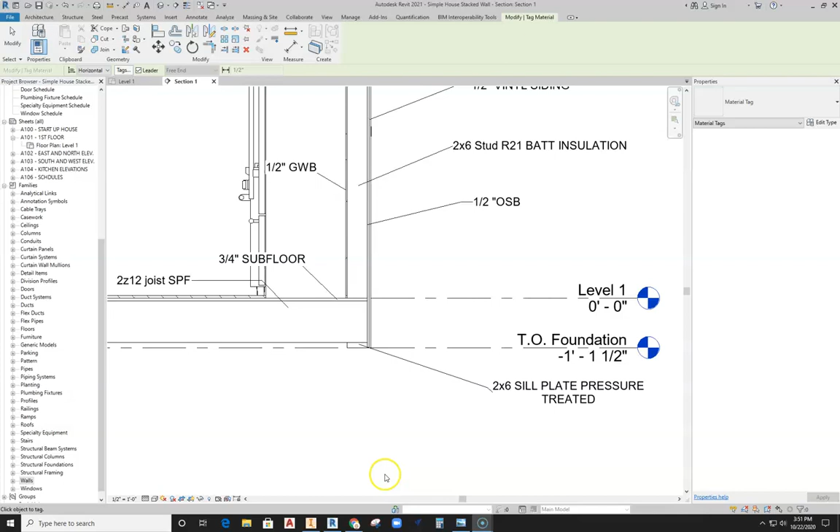Okay, in this video we're going to talk about how to get a foundation wall built underneath our stacked wall. If we jump back into the drawing assignment, you'll see we have our stacked wall on top, and underneath we have a foundation wall. This is a masonry wall, 8-inch by 16-inch masonry concrete, with a 24-inch footer underneath. We're going to build this as one wall.

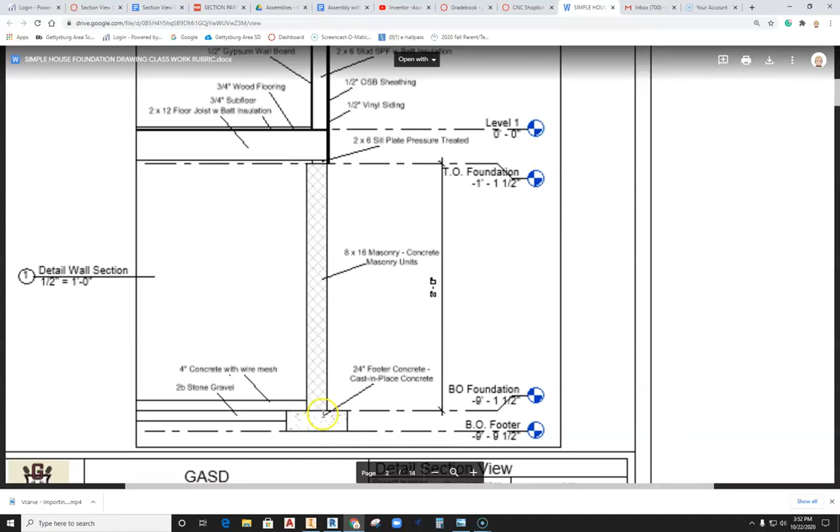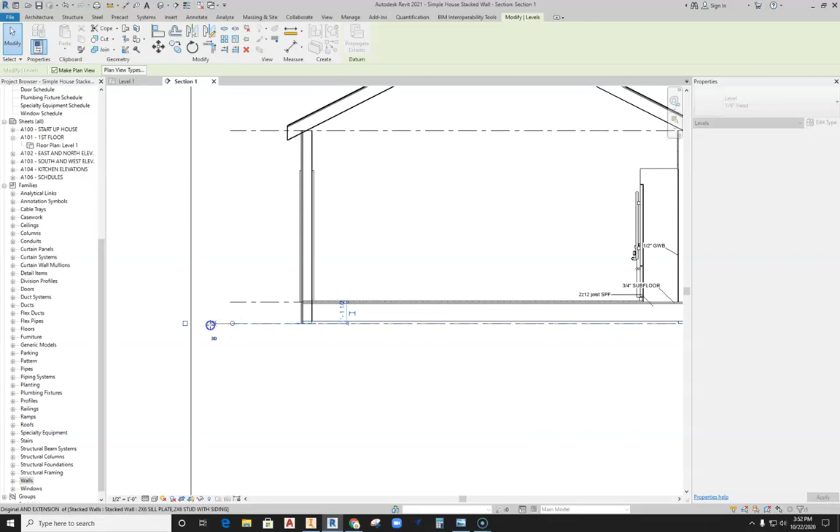Let's jump back into Revit and get started. One of the first things we need to do is set up our levels so we have levels to work with. I'm going to extend this crop so I can see a little more, and try to get my line layers linked up so we can move them all at the same time. Yep, that just linked up there.

Now we can grab the Architecture tab from the top of the screen and come across to grab the Level tool. We're going to set up an additional level here. We already have the TO foundation, so let's take care of the BO foundation, which stands for bottom of foundation.

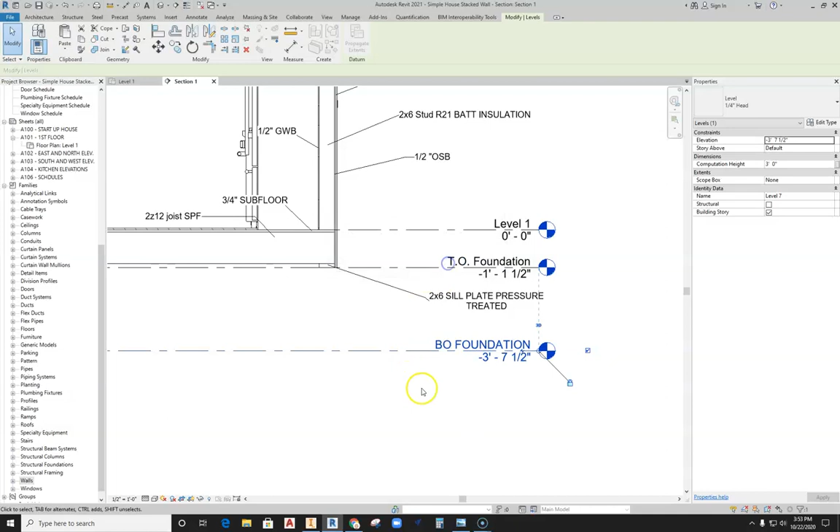Yes, we're going to rename the views. We'll go ahead since we're in this process of making levels. We'll make another one right away and set this up, and this is going to be BO footer - so we'll take care of BO footer.

Now we'll go ahead and set up the depths. The BO footer is -9 feet 9.5 inches. Let's dive back into Revit and set this up - so this is going to be -9 feet 9.5 inches. All right, whoops, -9 feet 9.5 inches, there we go. And then this is going to be -9 feet 1.5 inches.

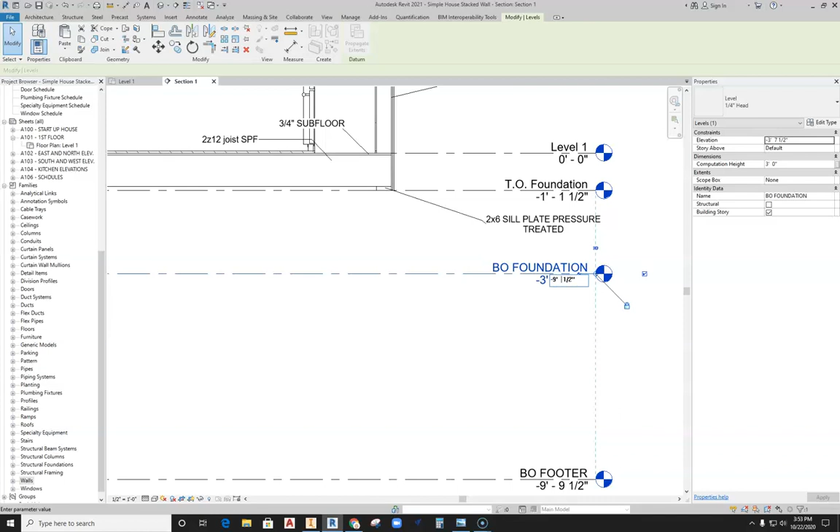And then we can see that we have an 8-inch thick footer. So we'll go ahead and select one of these lines, and we get this little tiny squiggle here, this little elbow - click on that. That adds an elbow. We can easily add an elbow and pull this one up by the little dot so we have nice clean levels to work with.

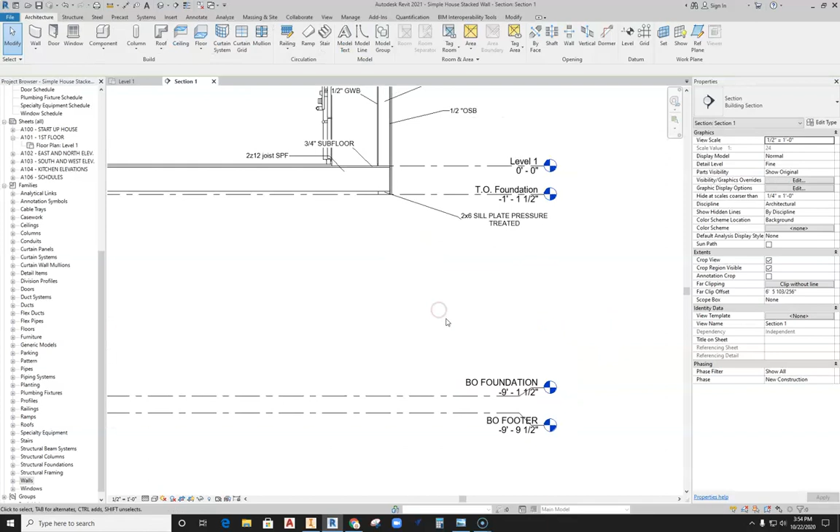So now with this set up in place, we're ready to start making our wall pieces. I'm going to go back to level 1, then go up here to my wall tool and slide over to it. We're going to take a look - this says I've got a 2x6 sill plate, pressure treated. That's great, that's part of my stacked wall. So I came down here and grabbed that generic 8-inch wall.

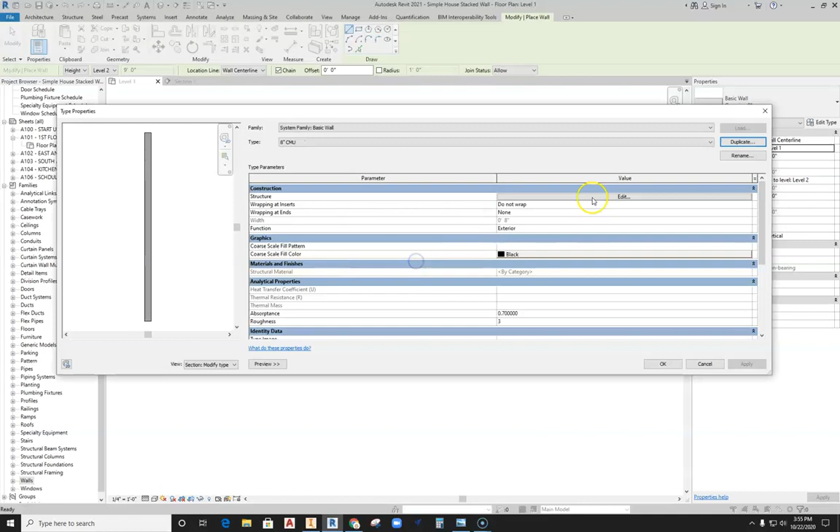Then I'm going to hit Edit Type, duplicate, and this is going to be called 8-inch CMU, hit OK. Grab the Edit - thickness will stay 8 inches because the CMU standard is 8.

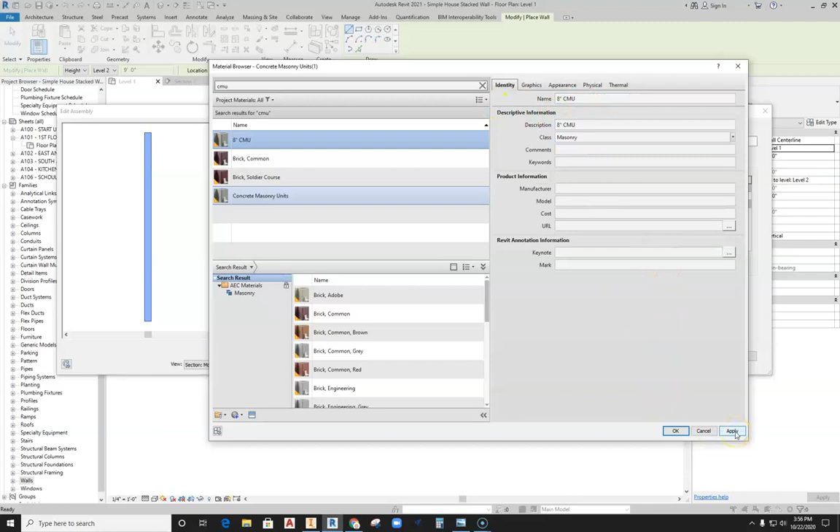Then we're going to type in CMU because we're going to find that concrete masonry unit material. Right click, go ahead and duplicate, then change the name - this is going to become 8-inch CMU. Then we'll highlight it, Control C, and paste it in here, Control V, so that description pops up in my materials when I tag a material. Hit Apply, hit OK - that's my 8-inch CMU, hit OK.

Hit OK, that's great. Then we're going to hit Edit Type again, duplicate, and right away change this - this is going to be a 24-inch by 8-inch, and this is going to be a concrete footer, getting rid of the CMU there. So that's a concrete footer. I'm going to go ahead and edit the type here - this is going to go in, and we're going to type in concrete.

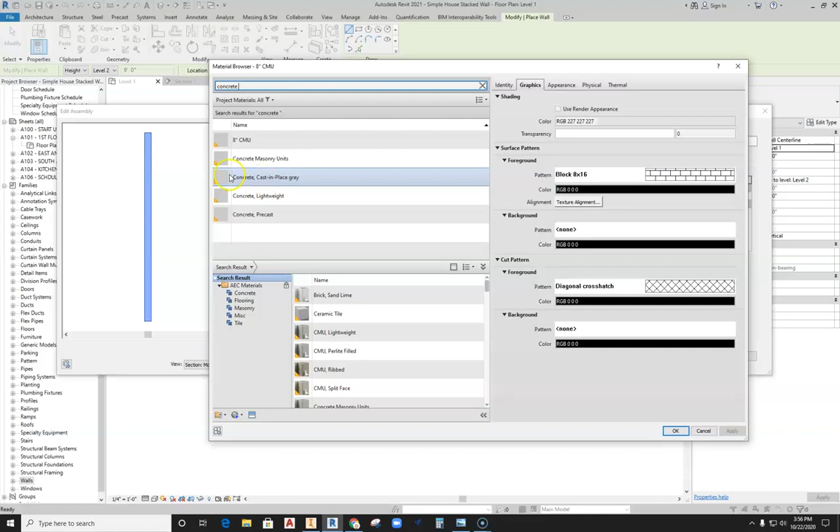And with concrete set up here, we're going to find cast in place gray, right click, duplicate, identity, and now we're going to call this out 24-inch by 8-inch concrete footer. I'm going to highlight that, and place that here.

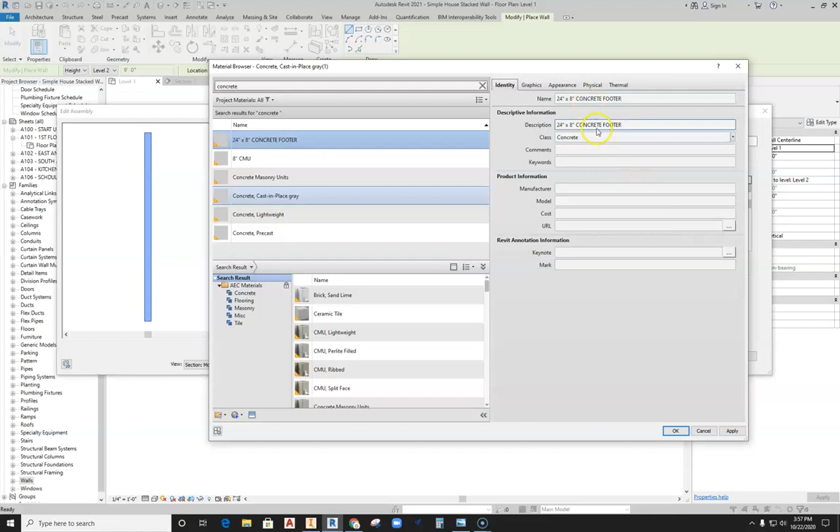So now my description is set up for my wall. Again, it will work when I go to tag my materials, so that's good. Now they're good, I got my two walls set. Hit OK, don't really have to do much more now.

Now I'm ready to start to build the stacked wall. I'm going to pull this down, slide down to the bottom. There's my stacked wall I built the other day. We'll grab that, hit Edit Type, and then duplicate.

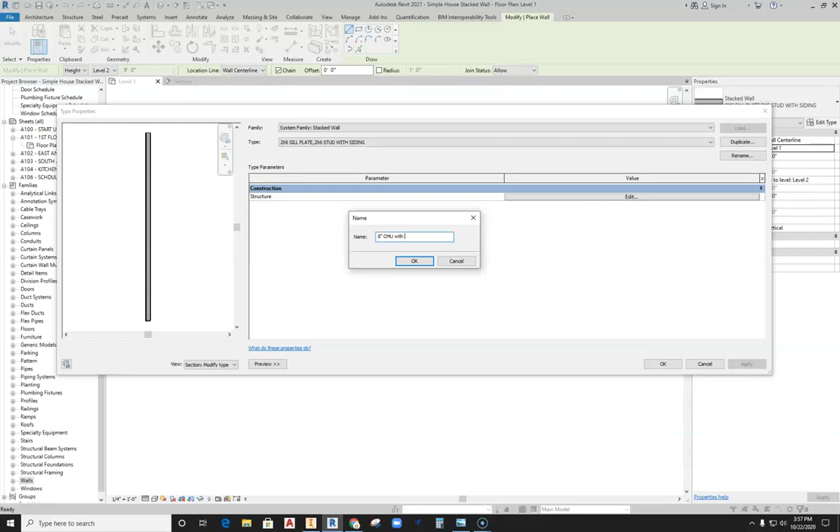This is going to be 8-inch CMU with 24-inch footer. Hit OK, edit. Now in my line 1, I'm going to get rid of this wall. I'm going to grab the 8-inch CMU for the top, that'll stay variable. Underneath it here, this is my 24-inch concrete footer, and now this becomes 8 inches because that's a standard 8-inch in height.

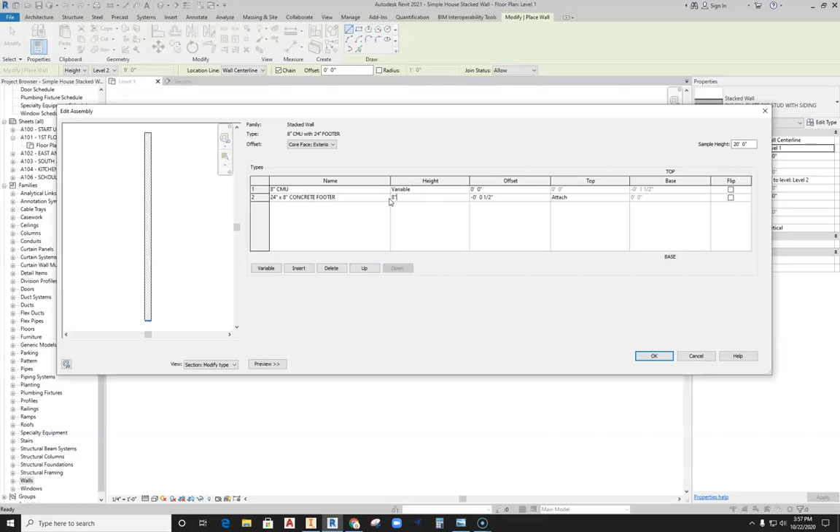So now I can see what's going on here. Oh, you know what I did? I didn't change the width of my wall. So we'll just hit OK here for now, hit OK here for now.

Let's go back into that wall, that 24-inch concrete footer, hit Edit Type, Edit, there's my thickness. Well, it didn't change, I didn't change it. So that thickness should be a 24-inch wide footer. Okay, so we go back and set that up, hit OK.

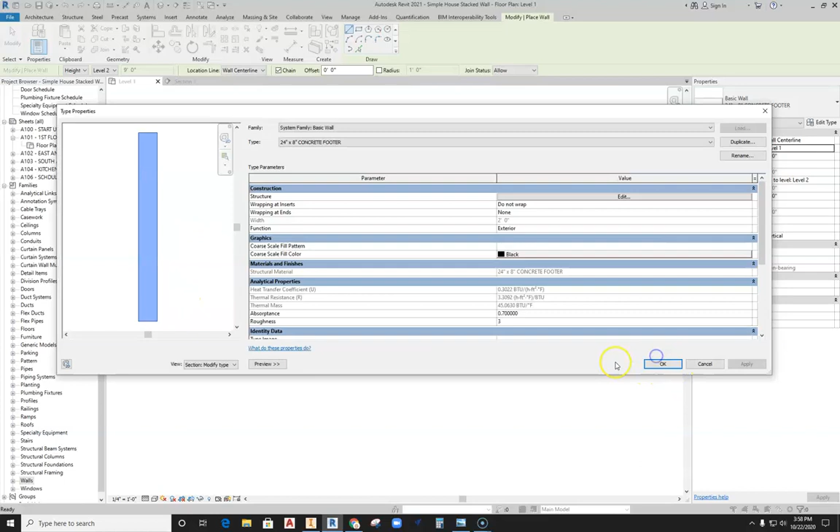And it's great, we can just slide back down, and you can see there's my wall, 8-inch CMU. That's my stacked wall with the footer. And I jump back in here, and oh look, it's already updated itself. So any change you make to that base wall goes into your stacked wall.

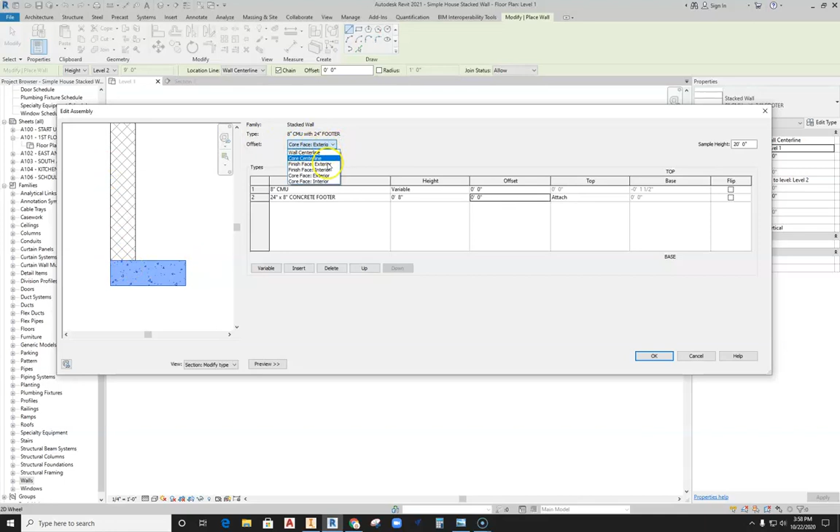So now here's my offset, that's my little bump over here. I don't want that, I want a 0 there for now. And because I draw with the core face exterior, most likely I'm going to keep that core face exterior, but I need to get that footer underneath of that foundation wall centered. So let's go ahead and make that 8-inch for an offset.

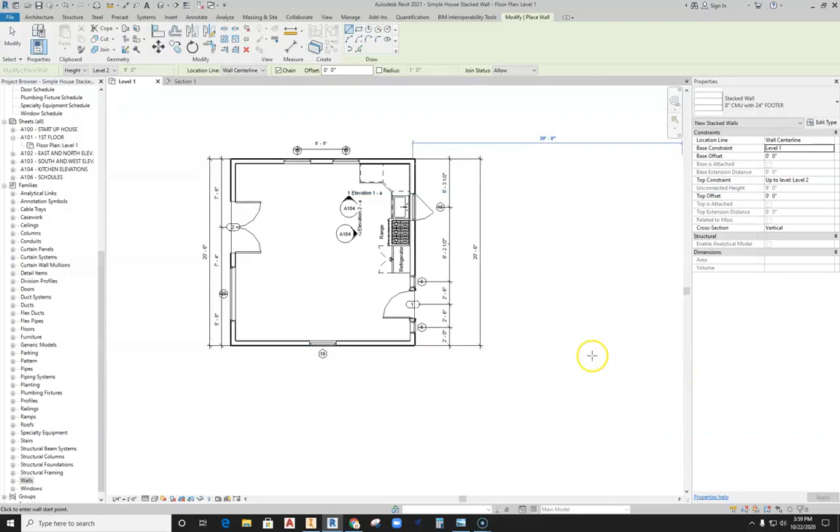And you can see it pushes that footer over, and it's now centered on my foundation wall. So it looks like we're all set and ready to go here. I can hit OK, I can hit OK again, and now I'm ready to go ahead and start drawing my wall.

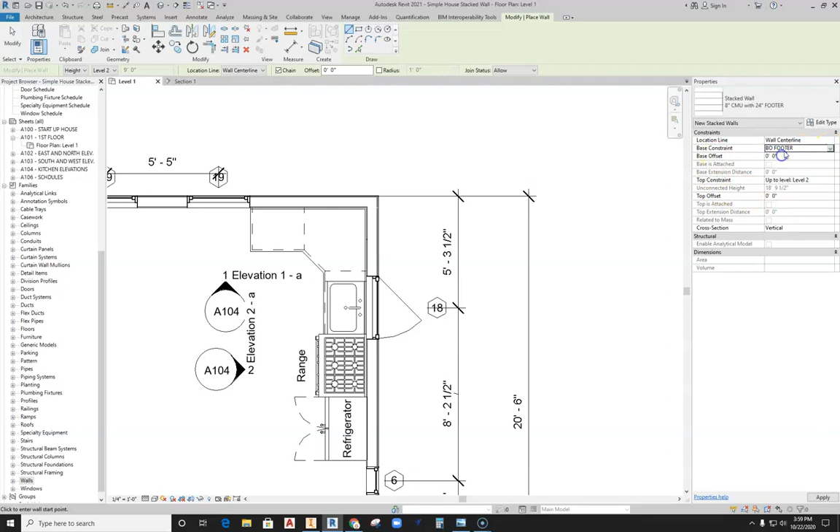Now, I want the wall to be set directly underneath of this house, but my levels need to be set properly too, because I don't want it set to base constraint level 1 — that'll be inside my house. So I'll take my base constraint here, and set it so it's BO footer, because I have a footer under there. I'm going to take this up to TO foundation.

And the last thing I got to do before I start drawing is I got to change this wall location line. Like I said when I built that wall, core face exterior is what I want to run with. So we set that up, BO footer, TO foundation, I'm ready to go.

So let's zoom in here on the wall, and this is the stud, this is my sheeting. So I want to run right on this line, right here, wait till it locks up. There's my locking point, going to grab that, and now I'm going to just trace that line.

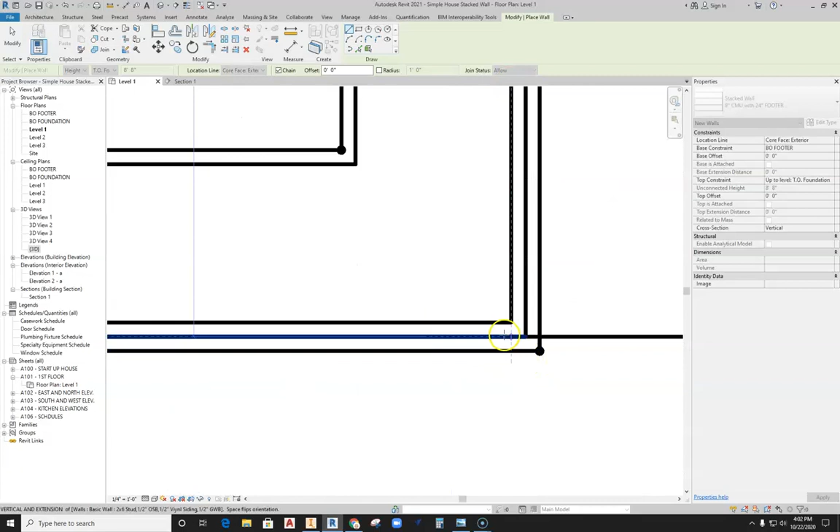So I come down here, make sure that links up. A little error pops up there, it says you can't see the wall. I know I can't see the wall in this view, that's because I am in the floor plan, and my floor plan doesn't allow me to see down to my foundation. So that's fine, we go ahead and run that around. So there we go, we got the foundation set.

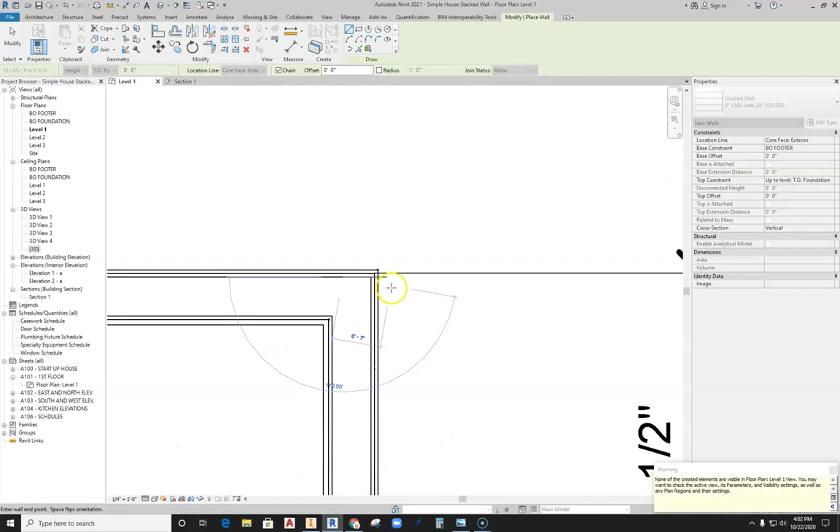Hit escape, and now let's go ahead into the section and take a look. You can see my foundation wall lines up directly with my outside wall. Now, on this side, you can see the floor system's nice and cleaned up, there's my sill plate, all that looks great.

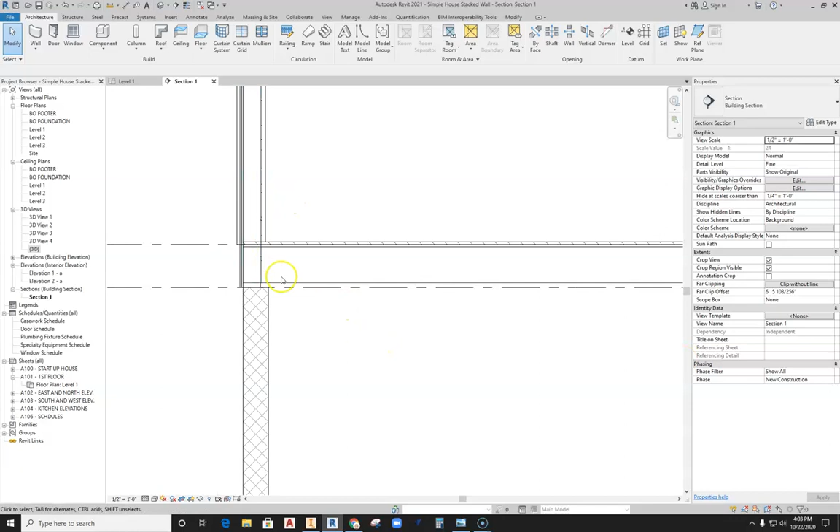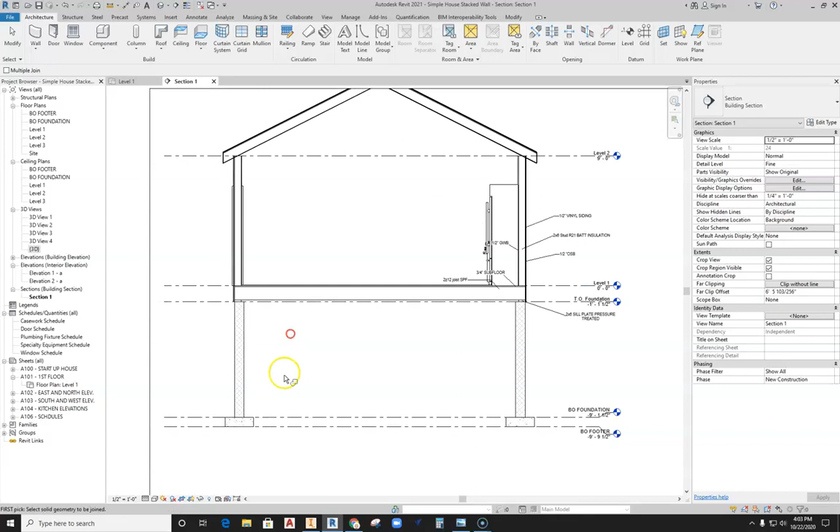Over here, where I have my sill plate and the floor, these have not been tidied up yet. So I'm just going to select one, hit join, grab the wall, grab the floor, and you can see now it cleans itself up. So now I've got a stacked wall underneath of my simple house. Hopefully that helped you guys work through the process of getting a stacked wall under your house.